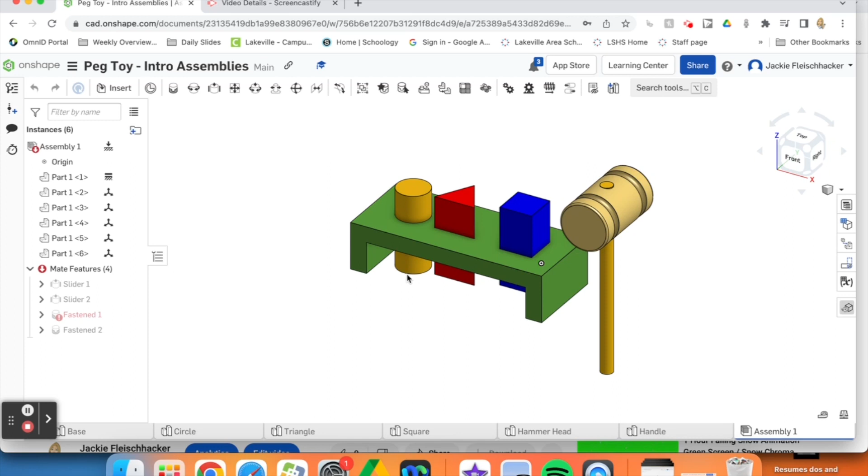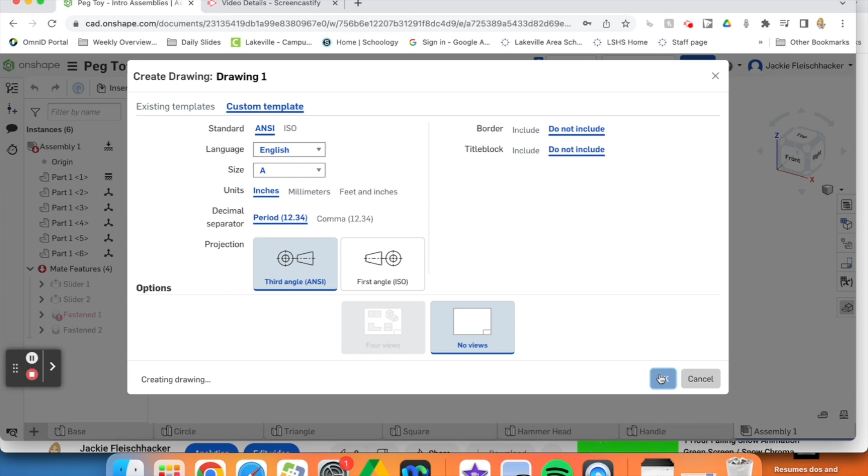So we are going to do our little plus and create drawing. It's going to open up this window with some templates. I tried creating our own template, but it would just freeze up the computer. So we're going to do a custom template. For border, do not include, and title block, do not include. Everything else stays how it is, and we'll hit OK. This will give you a blank sheet.

So now it's asking us what part we want to bring in. Sometimes if you first open it, it might just look like this. This insert view is how we bring in a part by clicking insert. We are going to start with our hammerhead because this is probably the most complex one, so we'll get that done first.

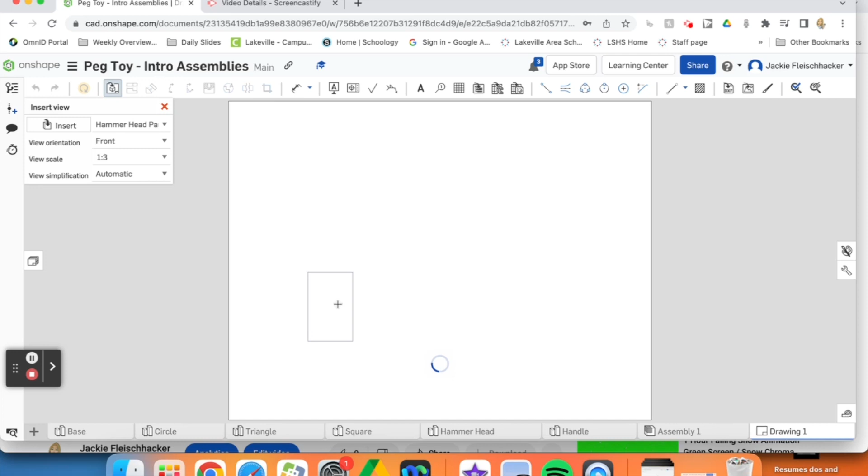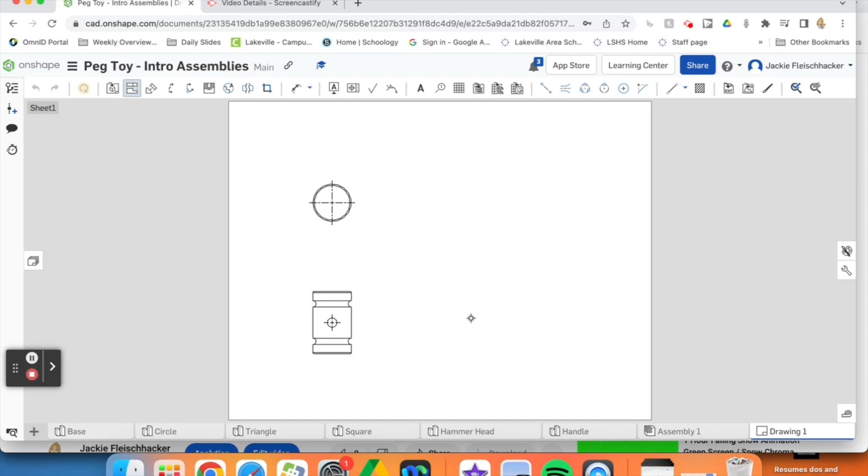You can see it has a shape stuck to your mouse, and this is what we want to place as our front view. In our lower left corner, we'll click where we want it. Now if I move my mouse, it has a shape stuck to it again, and that's our top view. Now I want to place my right view. If I click our front view and move to the right, it'll populate our right view, and I can click to place it, which looks basically like our front view.

Then I'm going to click our front view and go at an angle to get our isometric view. Because you're going straight off of them, it knows what view you want to do.

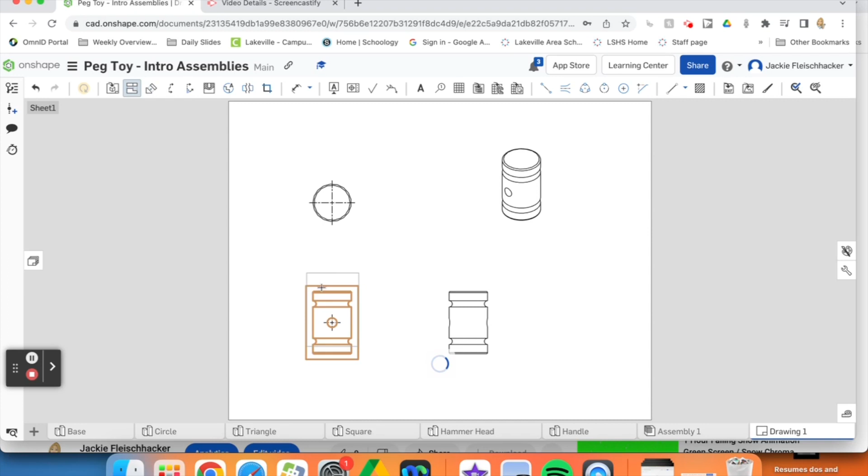So I'm going to double click on our hammerhead and it brings up this property. One thing we're going to change is the scale. We're going to do 1 to, oh not 1 to 1, 1 to 2, so it's like half scale, a little bit bigger to work with. So there is our scale all set.

So we need to do our dimensions and turn on hidden lines to make this a correct drawing sheet. Basically all of the dimensions we used to make our shape is what we're going to need to add on here. So here's our dimension tool.

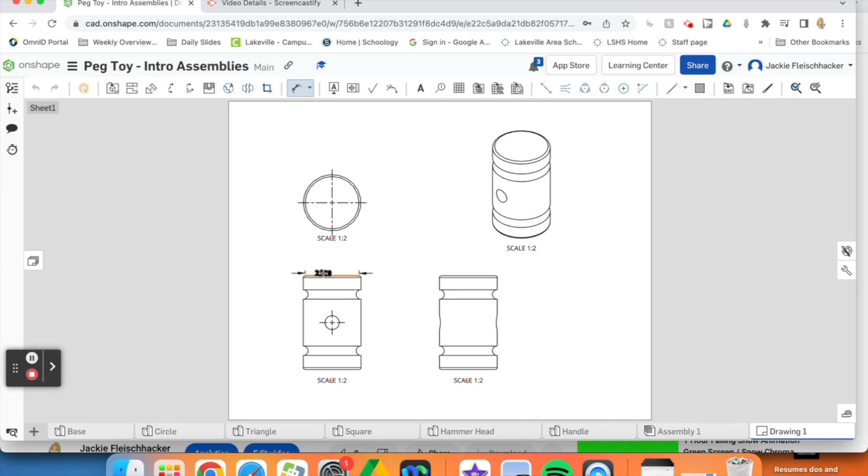I'm going to start with doing the height of it. So that is 5 inches. I'm going to do the height of this little side piece because that was 0.75, on the top and the bottom.

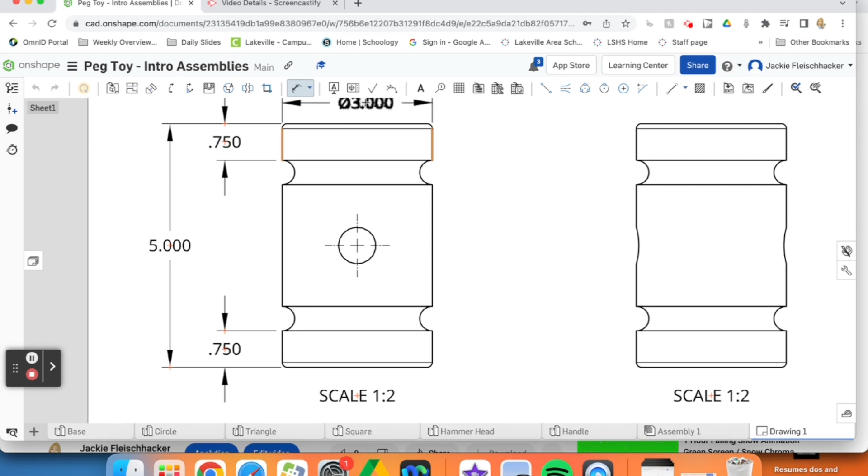So when you are doing dimensions, I'll go across the top here. I'm going to click the first line I want to dimension from, the second line, and now this dimension is stuck to my mouse. Wherever I click is just where it places it, so you just want to place it in a general good spot. Remember, we don't want to put it on top of stuff where we can't see it; we want it on the outside. So there is our width of it.

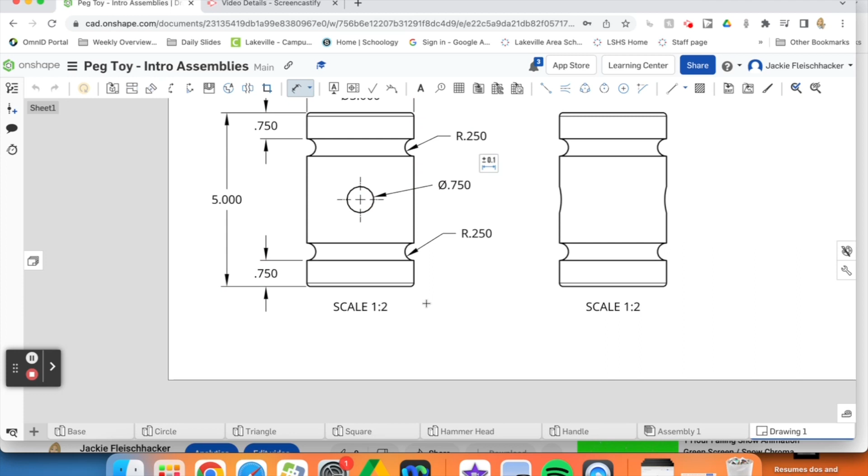Let's get in and do our little circles here. So I can click the circle and it's going to show the radius because it is not a full circle. We can do our hole and that's going to show the diameter. And that should be everything we need, because those are all the same numbers that we used to make it. We do need to add a couple of things.

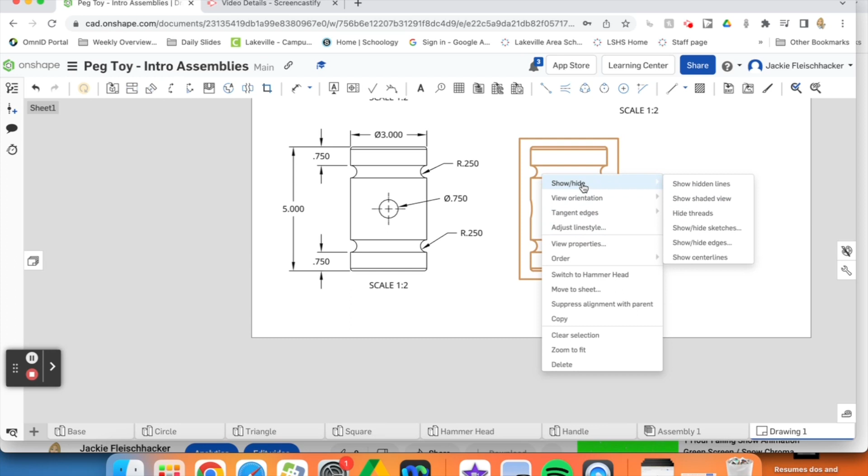So we need to show that this hole is cutting all the way through. I'm going to turn off my dimension tool and click my right view, then right click on it. I'm going to show hide hidden lines. It should now add to show that that hole is going all the way through.

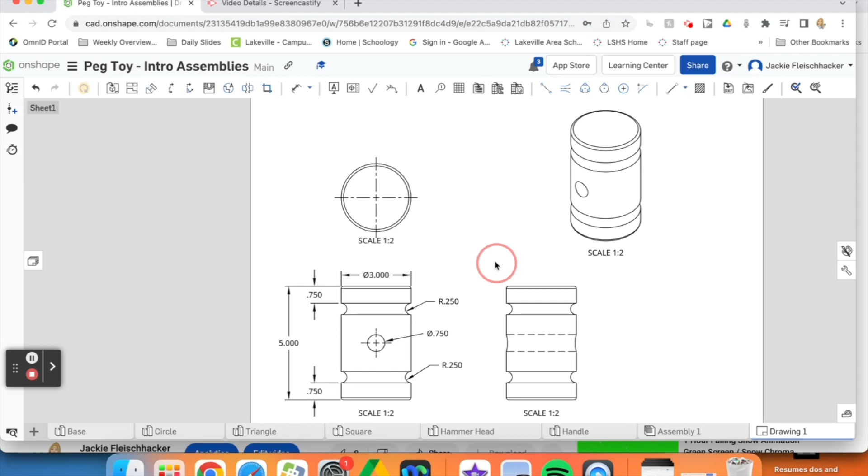We also need to add a little note about that rounded edge that we did. So I'm going to move up here, and in the middle I'm just going to add a little note that says, I think we did a fillet. So if you did a fillet or a chamfer, you'd be able to write that at 0.1 at top / bottom.

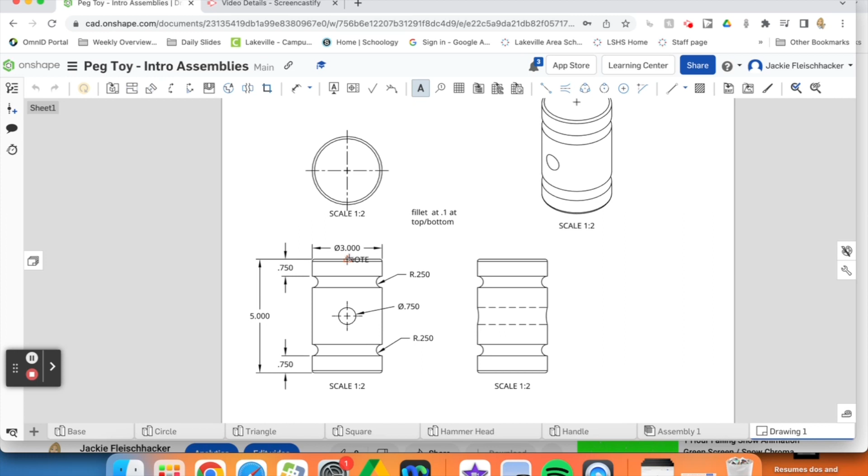I'm going to stretch this out. That's a good little note right there, so it's just telling them that you'd add that. That's what that little line is there for.

We also need to add in your name. So I'm going to grab a text, and it's going to be your name. And then we want to name the part also, it's just good practice so that people know what part they're looking at. So this is Hammer Head of which project, Peg Toy. That'll kind of be our setup for all of our naming of these things. It'll have your name, the part name, and then the project name. And I'm going to make this bold, and a little bit bigger.

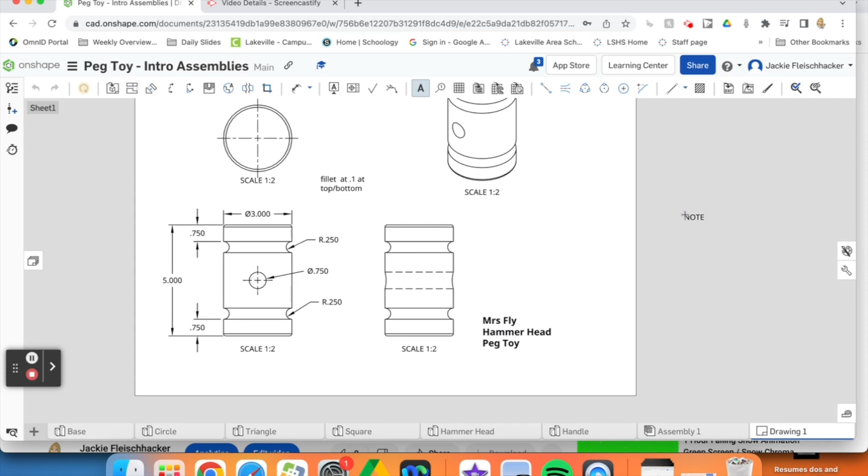All right, so there is our first sheet. We can do all of our drawing sheets in this one drawing tab. If we click this little button here, it opens up all of our sheets. So I'm going to rename this sheet Hammer Head, that way I know that that's there, and I'm going to add a new sheet right into here.

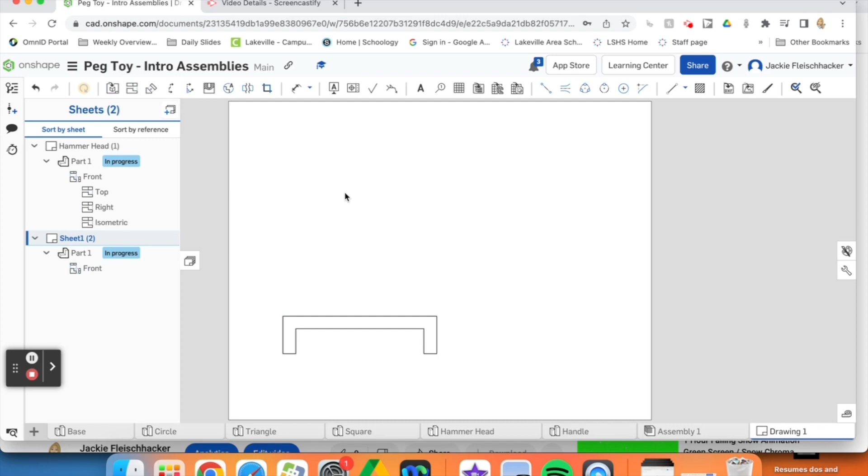This is going to be our Peg Toy base. So for our base, we're going to bring that in. It'll give us our front view. We move straight up, it gives us the top view. If I click the front view again, it'll give me the side view. And then front view again to get the isometric. And then I'm going to turn that off.

So your task now is to add in the dimensions that we need to make this a full drawing sheet, and add in your name, base, Peg Toy, labeling on here. You're going to do that one on your own. I'm going to call this base.

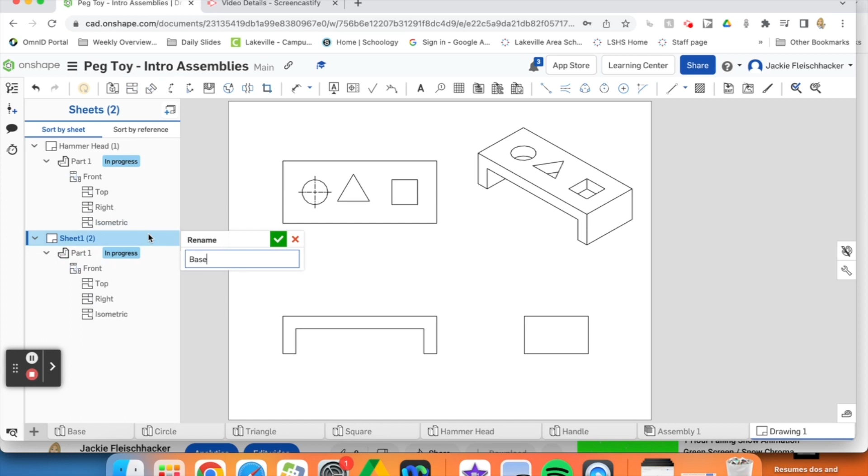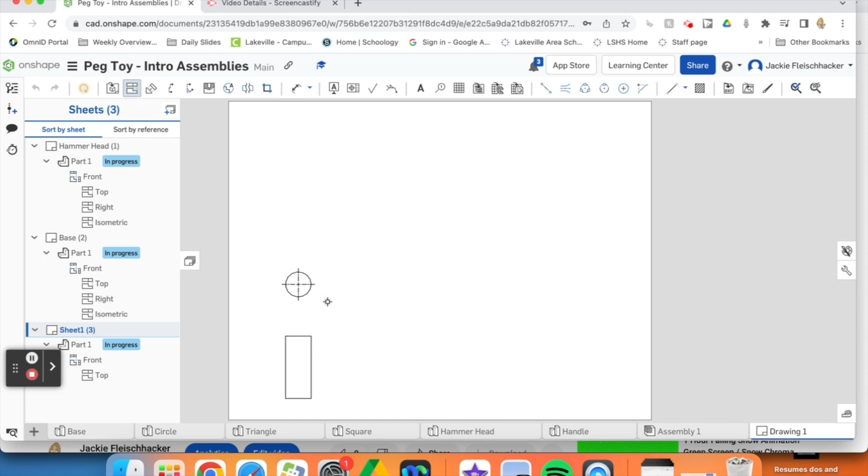Our next sheet is going to be of our pegs. Since our pegs are really simple, we are going to do them all in one sheet. So I'm going to do the circle, this is the front view and the top view, because that's really all that we would need for it. And then the isometric, just to show that it's the circle one. I can add in our other...

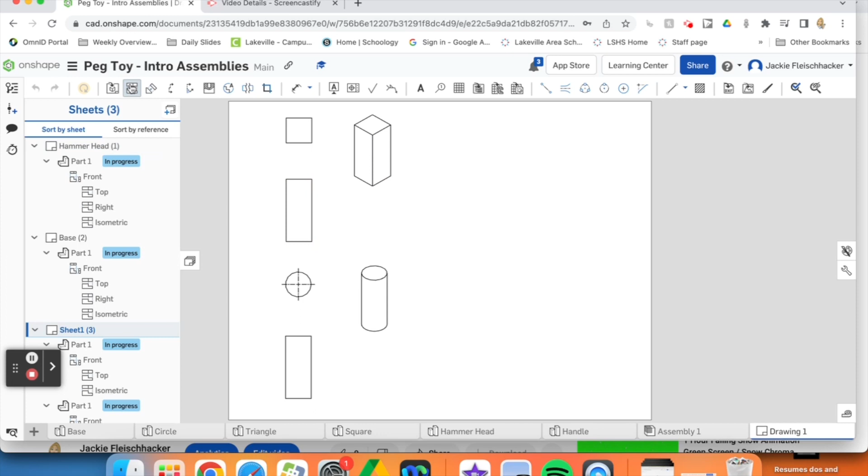Let's do our square. So our square, the top of our square, and then our isometric. We're going to add in our triangle, so the front view, the top view, and the isometric.

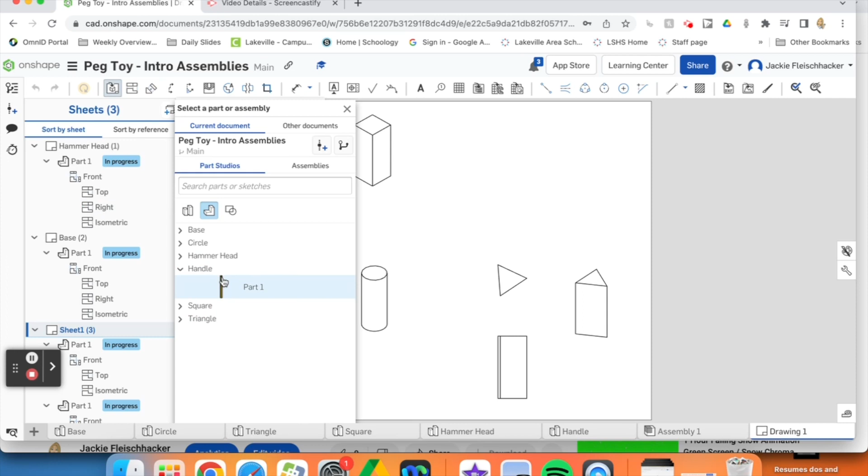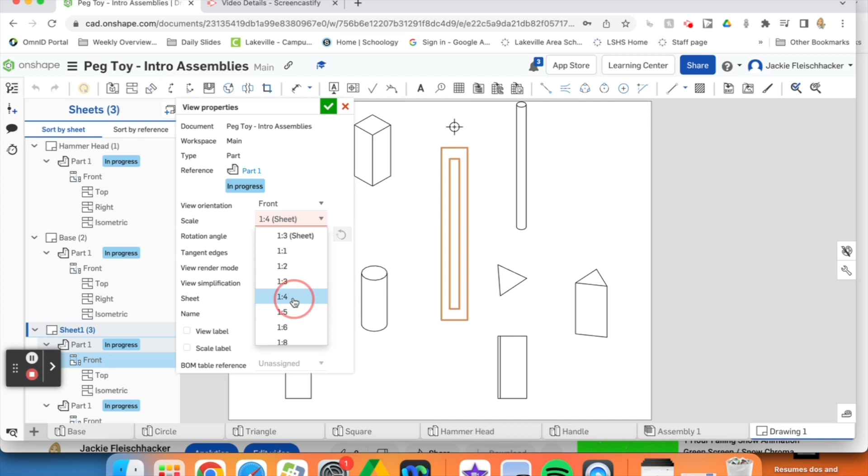I wonder, can we fit our hammer handle in here too? Because that one is also very simple. We might scale down the size a little bit, but the handle, the top, and the isometric. So to make this fit, I'm going to make the handle a smaller scale down here, 1:4, 1:5. And then I can just reposition those.

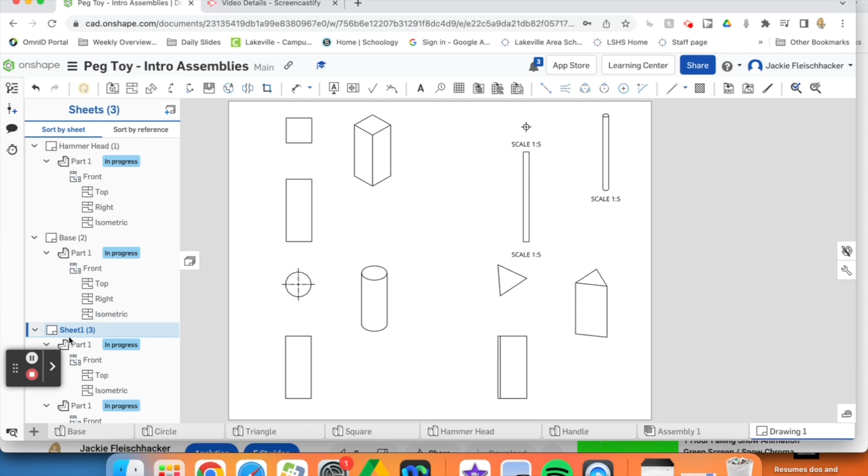So you can add your dimensions that you need, making sure that you're not over dimensioning anything. And then you can label each one, like square peg, circle peg, triangle peg, hammer handle, and add your name. So that is your third sheet. I'm just going to rename this pegs and handle.

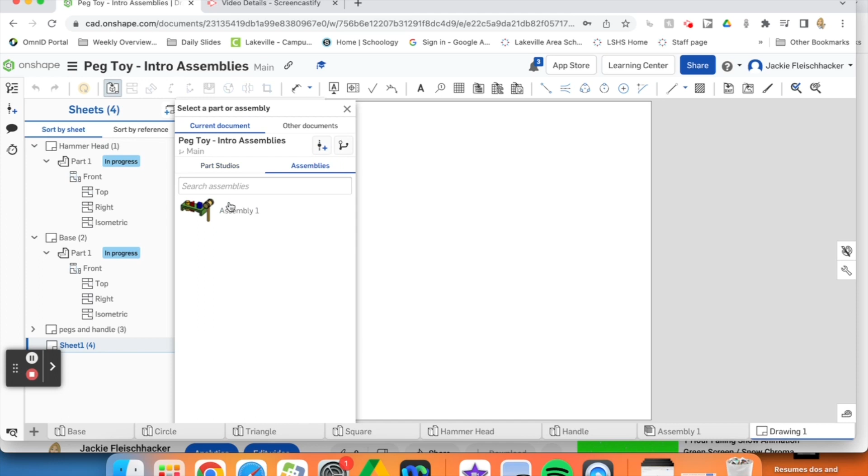Your next sheet, we have all of our parts done. Our individual parts are all in there that you'll be adding your dimensions to. So we're just going to add in our assembly, and we're just going to do one big picture, but we want it to be at an angle. So this is like the front view of it. We're going to change our view orientation to isometric and check mark.

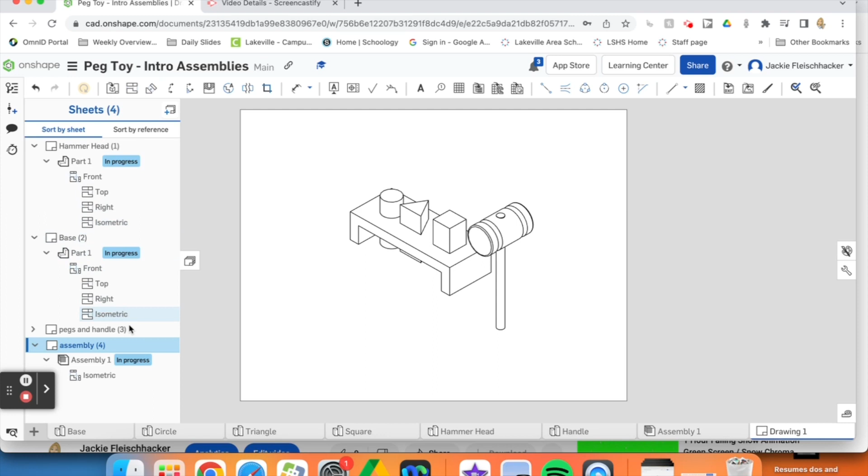So we're just going to call this sheet our assembly. You are adding dimensions to our base and our pegs and handle, labeling, giving your name and the name of the project in there for all of these sheets.

And now we are going to walk through how to turn these in. So these sheets are what you are submitting to Schoology. If you right click on drawing one, you can do export, and you're going to call it Peg Toy Drawings, and you can add your name. And so it's going to be a PDF.

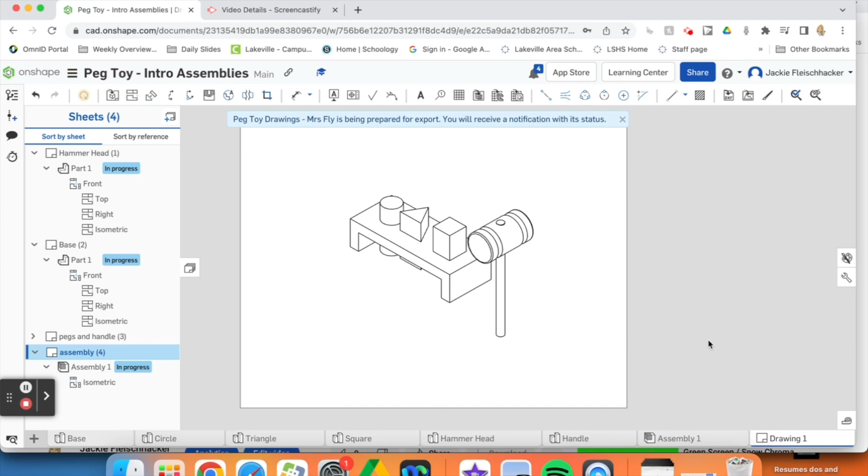Let's see, color. It'll go to your download, export. So it should download. It's saying it's working on it, and we'll see it right there. You can open it up. Oh, we didn't add color to any of our drawings. That's okay. But then you'll submit this, you'll upload this file to Schoology once you're all done with all of them, once it's all filled out and complete.